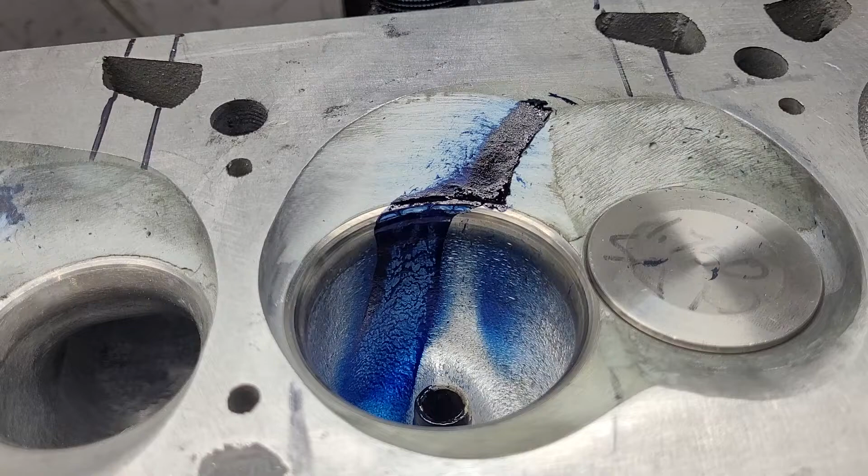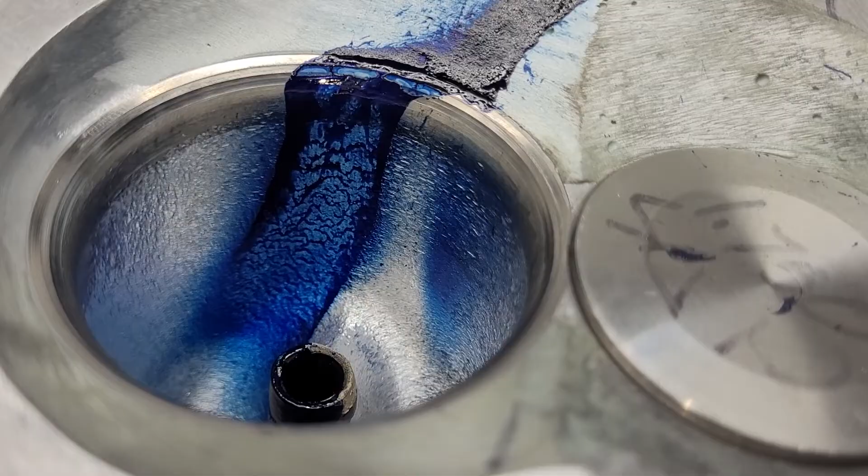Okay guys, did a little more work on the inside port of the Olds CNC heads. As far as our liquid flow goes, looks like we're quite a bit better than we were. Let's take a quick look at our chamber.

Interesting. Is it better? It's a good question. I don't think it's bad, I think it's pretty good. A lot of speckles on the valve. Not quite as much coverage, I think, as the last time.

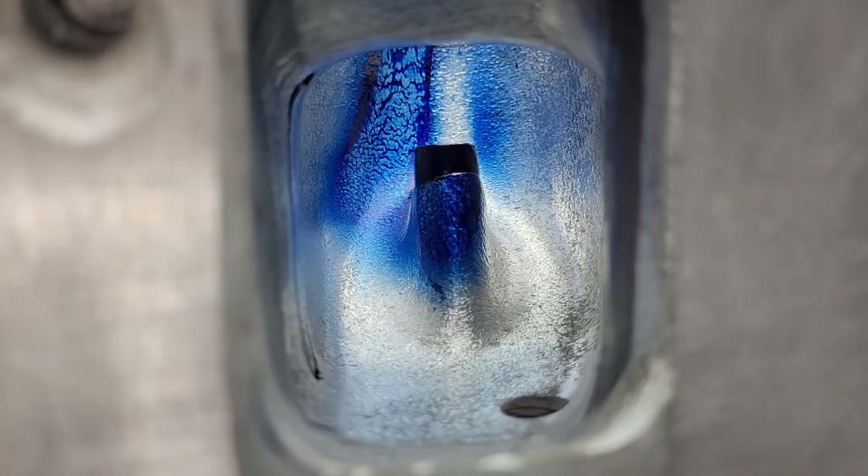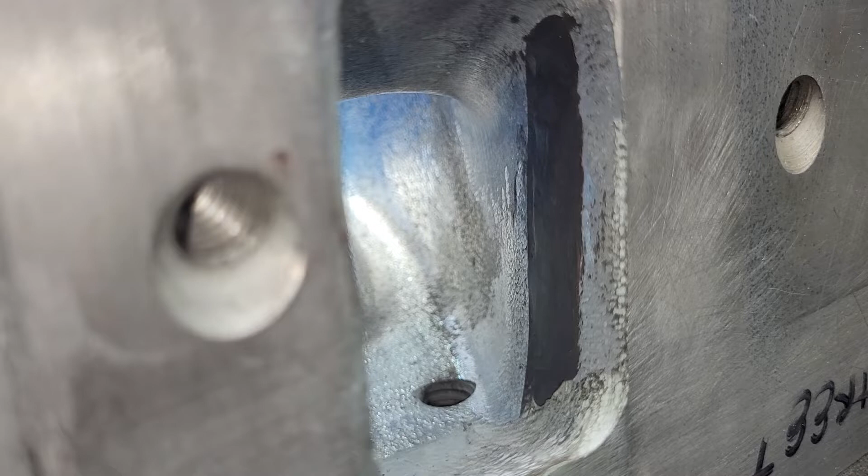Due to the port being straightened out more, we got way more liquid on the right-hand side. You can see that push rod has been moved over quite a bit and changed the port to feed that part of the bowl better. In reality, I had to do some work on the straight wall side too, because that machined out bolt really causes an issue.

I also noticed that this bowl was considerably narrower than the outside bowl, so I did add a little area where I thought it needed it.

Okay, let's take a good look at this bowl. Got a good hit on the guide. We got a nice wide swath in the bowl on both sides. I'm pretty sure that's the best we've done on the bowl to date. Take a look down, you can see right down to the filler. And our angle into the chamber is a good angle.

I did take a little area out over here because I thought that was blocking, it was a little too straight. In reality, I probably could use a little more area right there, but it's not bad where it is right now.

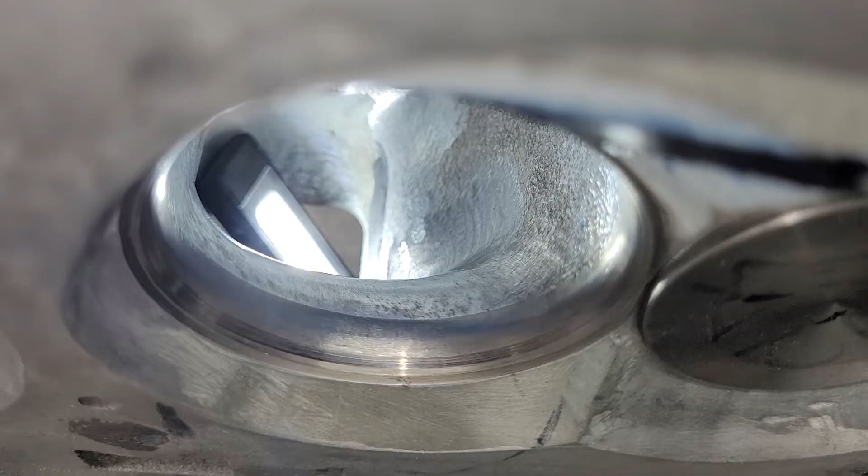Okay, the short side really doesn't look different. You can see where I gave it a little area on the center of the cylinder above the short side radius. You can see I hit it with a sand roll, it's a little notchy still. I should have looked at that some more, but it seems to have helped. So we'll take a look at that.

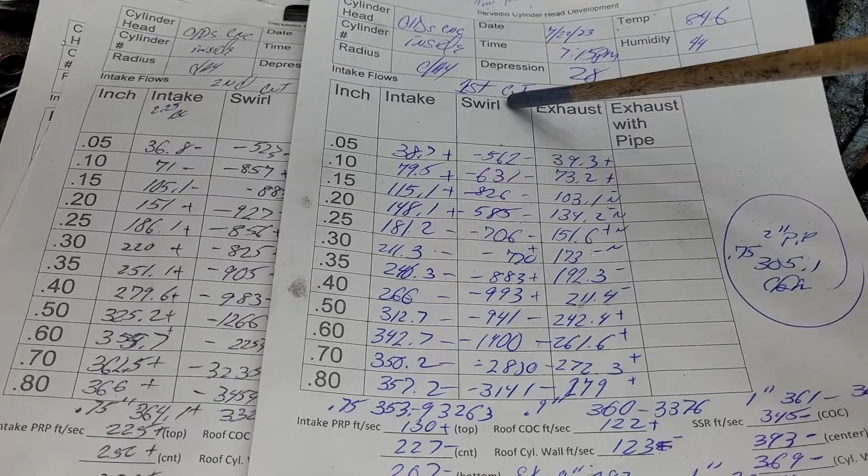Okay, I'm quite a few videos ahead, so I'm not really sure when this is going to air, but this is our first cut inside port, this is our second cut inside port. How did we do? Well, we got 2 minuses, 3 minuses, and then we did better everywhere else, so I'm going to take that as a win.

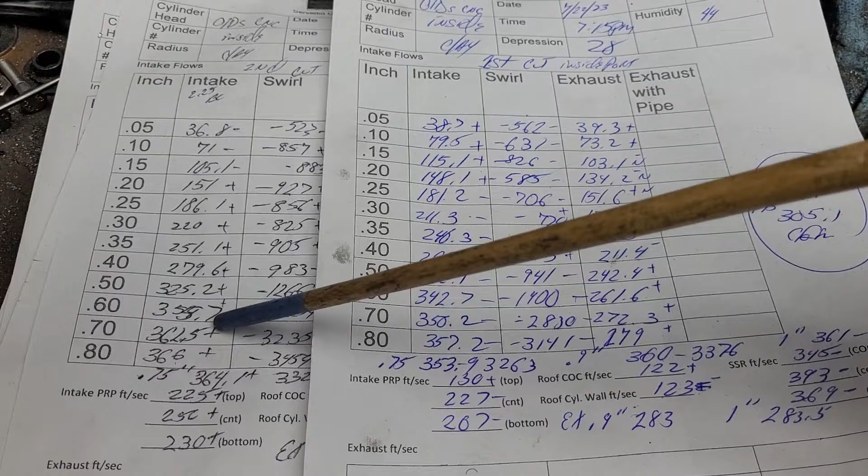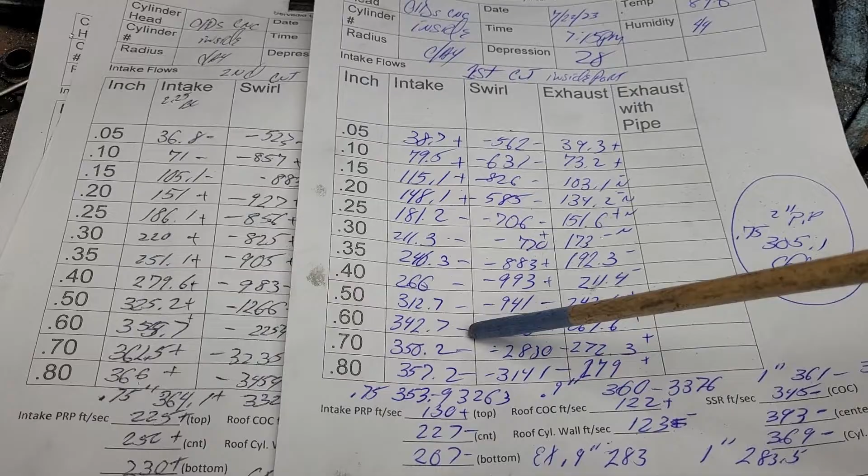Okay, 220 at 300 versus 211, I'll take it. 600 to 355, 600 to 342. Take it out as a win.

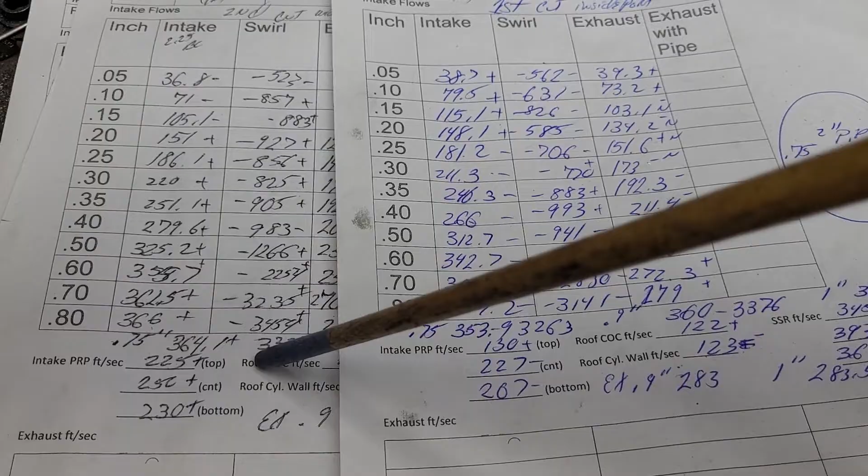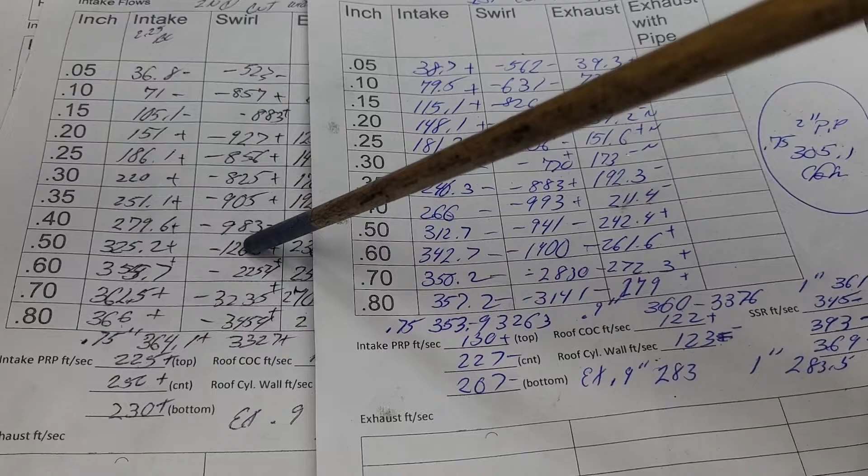We go 364.1 at 750, we got plenty of swirl, we got 3,000 and change. The swirl curve is definitely almost all pluses except for the very top, and we got one anomaly right here. That's when she just starts losing it over the short side. More than enough swirl to take care of things.

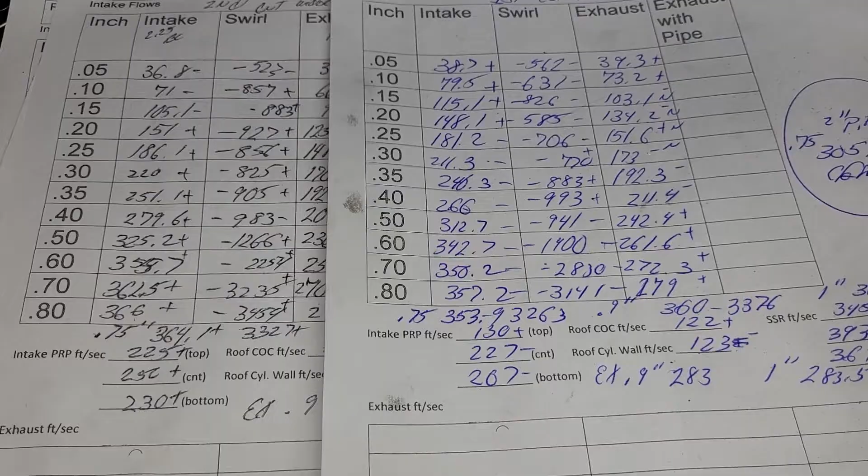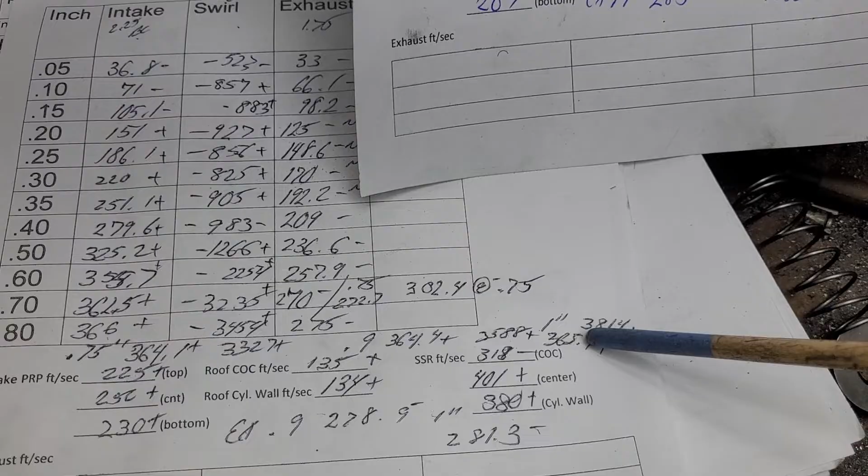Let's go to the higher lifts. Yeah, we're 366, 364, we start losing a little bit, 365. So that's telling me I could be doing some more work to that short side, but we'll wind up losing probably some in here.

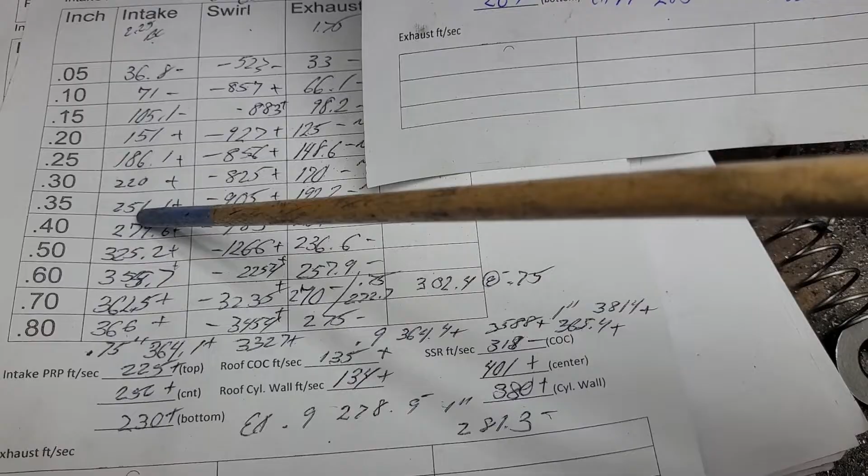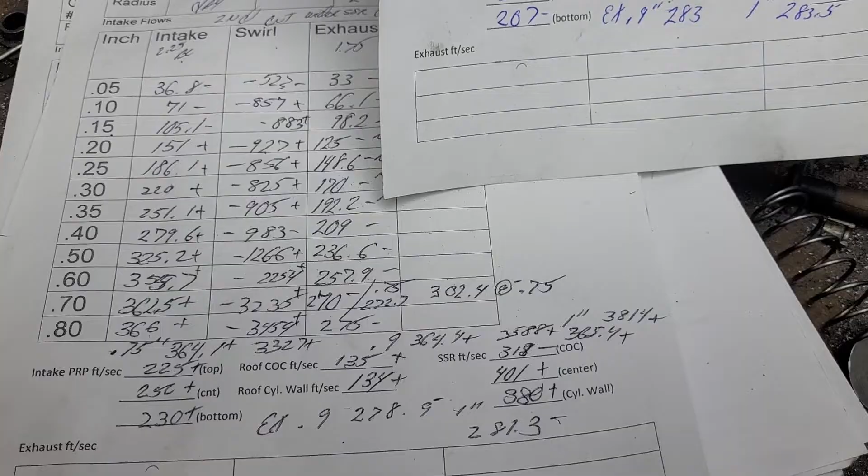And 220 is a fairly decent number. It's not great, but it's decent. And I think I'm going to have the owner take a look at this, put this in his computer and see what we've got.

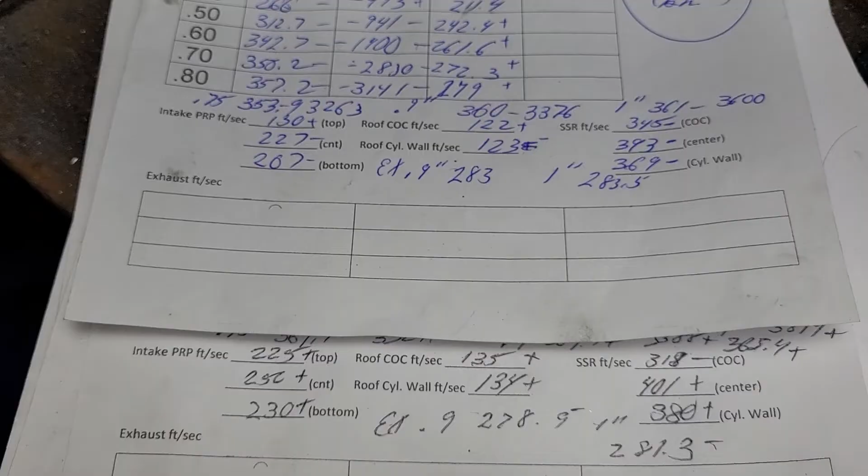Now, I did do some work as far as our air speeds, which I think was a big success. Okay, these were our air speeds, this is what are our air speeds. Plus, plus, plus, right? We went from 130, which is pretty dead, to 225.

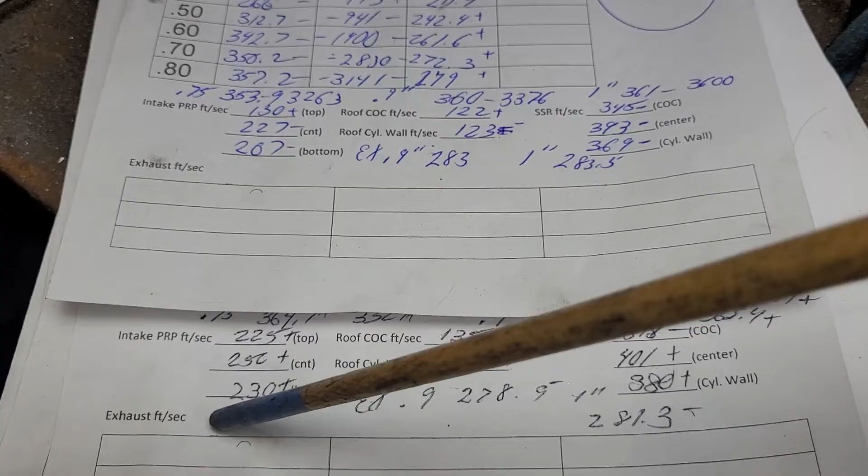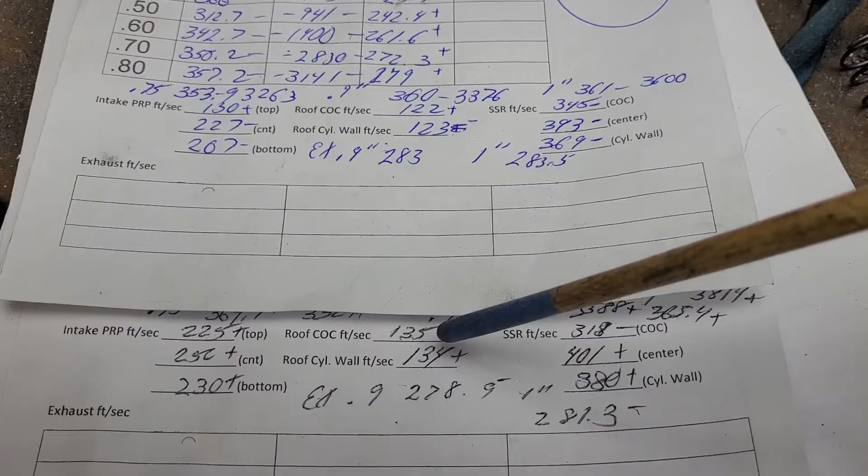Made a huge difference on your pushrod pinch, the whole pinch works way more efficiently now. Take a look at our roof, our roof picked up nicely. 122, 123, 135, 134. I did do work on that roof to fix those air speeds.

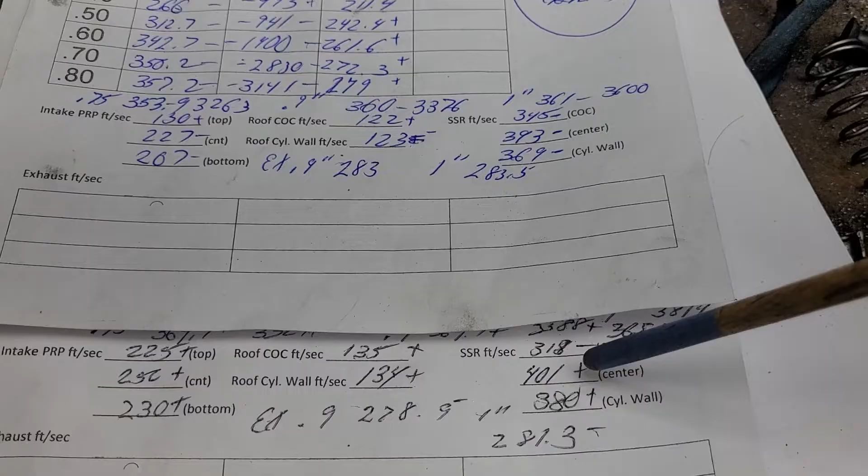Now take a look at the short side. Not a complete success, but not bad. We go from 345 to 318. 393 to 401, it actually went up in the center, where I gave it some decent amount of area here. You can see it slowed down, but that air didn't want to move over that way. I mean, some of it did because our liquid moved over, right?

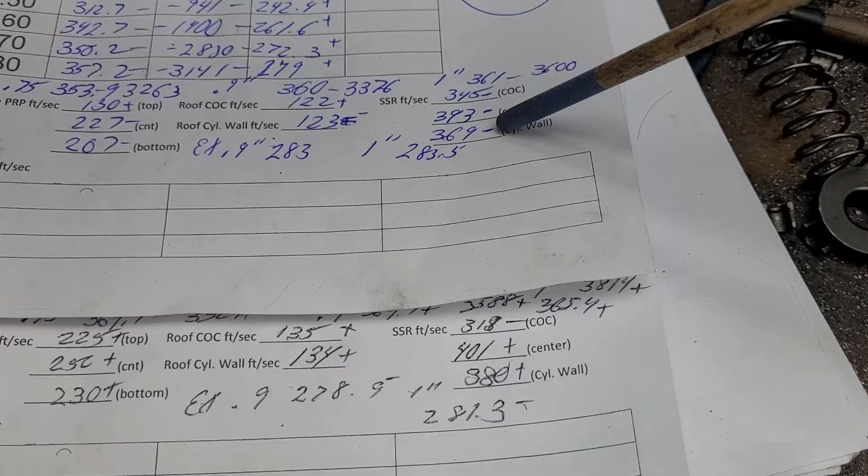And our last number was 369, 380, went up. Now this corner is tough because we got that bolt in the way. Let's take a look at that. Okay, that corner is tough to get.

Let's take a look at this way and we'll take a look at the other way. You got that bolt that's ground down, right? And a lot of air wants to get around that. I'm not sure what I should do with that, because I may be doing more harm than good at that point.

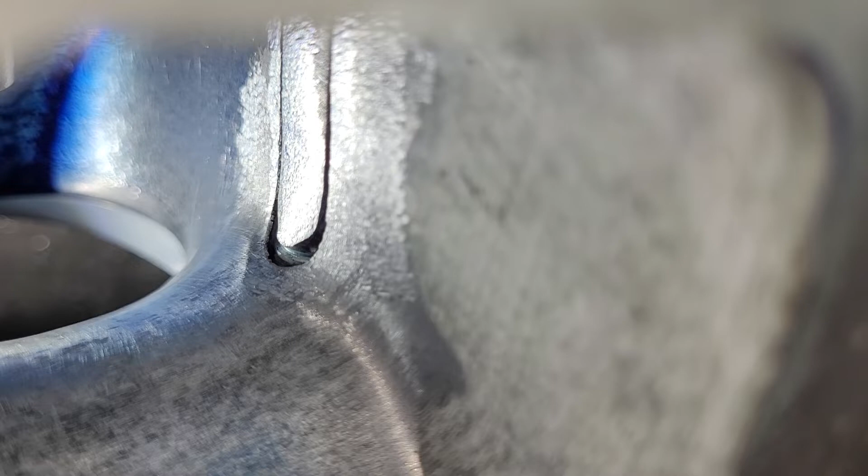Okay, I did leave a rough finish on that, that was actually a mistake. That should have been polished out, but I obviously forgot to do it. So that corner right there is really fast and could use a little more work, but I think we're going to hold off on that until the owner takes a look at the numbers.

We did get a little bit of blue right on the floor of the short side, similar to that. Not exactly the same, but not bad. Let's move that light. I'm going to take that as a win. Sorry guys, I think that looks damn good. And I get the feeling that this should stay where it is, because remember, we got two different intake ports.

Let's show the liquid on the other port. Okay, this is the outer port. Still not bad, definitely got more on the outside wall than the inside port, but it's also coming in at a different angle.

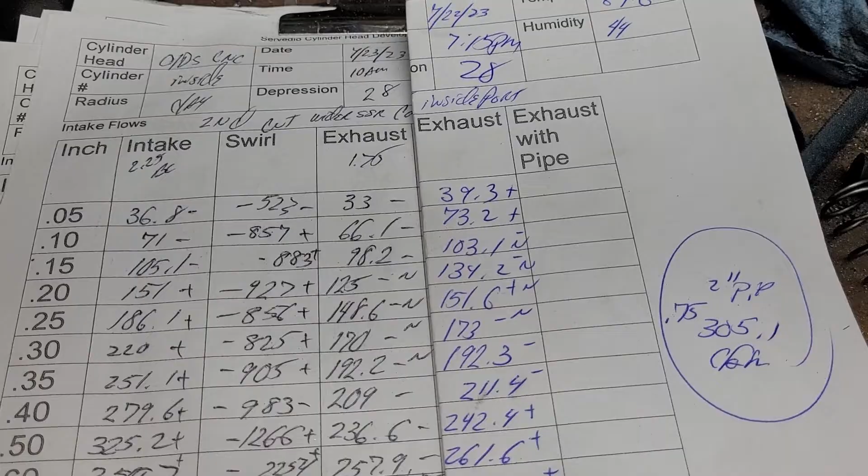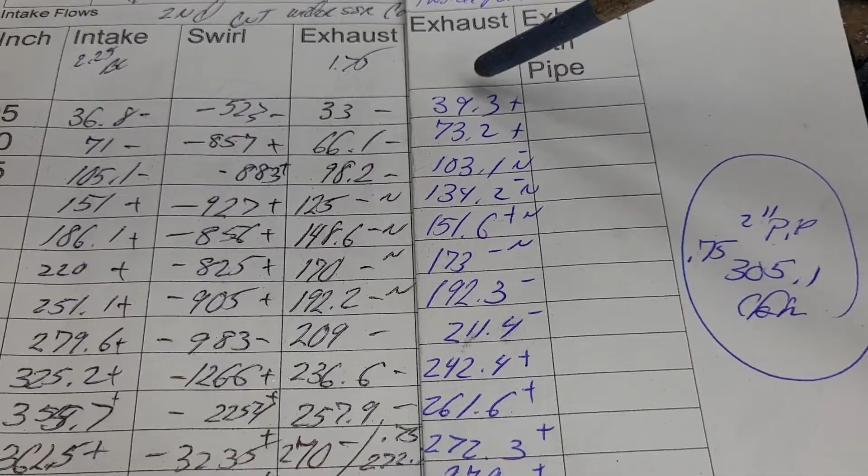Alright, I also did work on the exhaust port. Not a complete win. Okay, here's our second cut, here's our first cut. Minus, minus, minus, noise, noise, noise. All minuses, all minuses to 600.

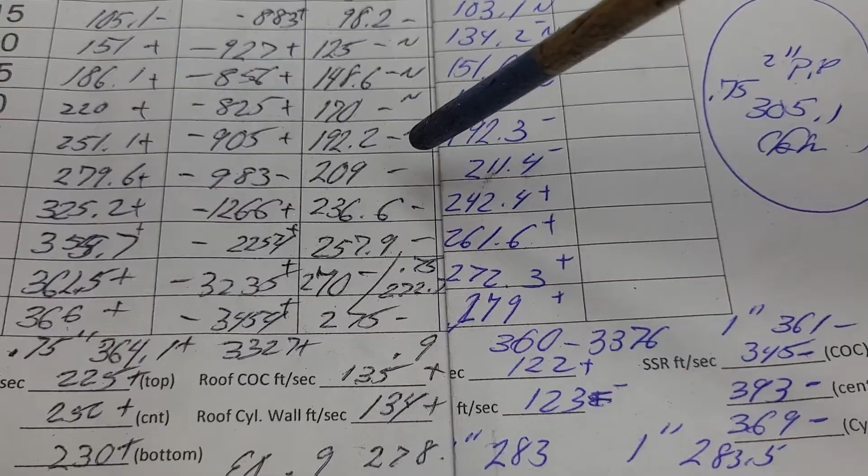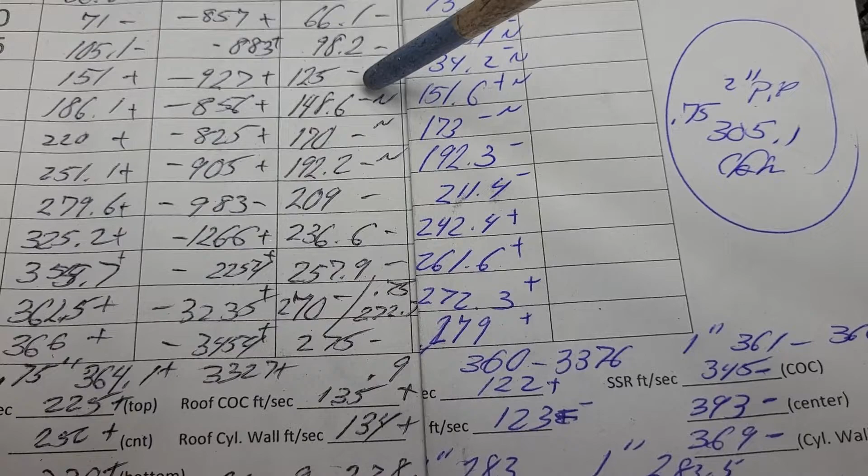Now, remember I also fixed the bore adapter on our bore, so there, it's much better now than the way it was. This was the way it was. It gave the exhaust, these flows had a lot more area around that exhaust. So this is more shrouded with our bore adapter.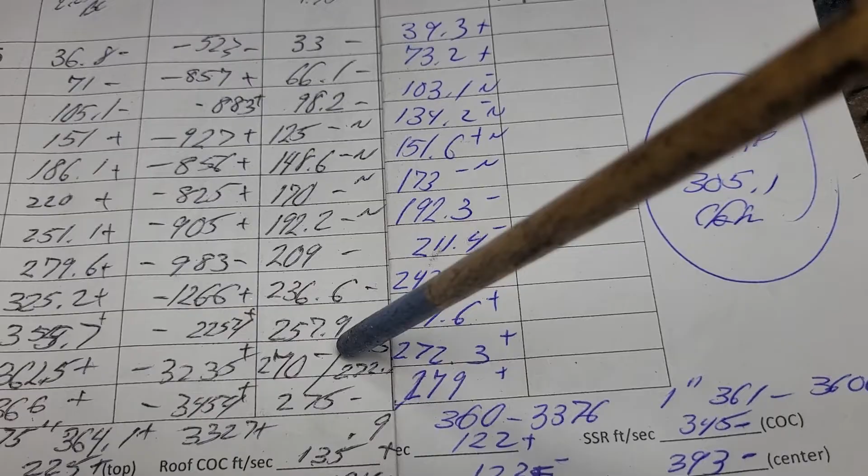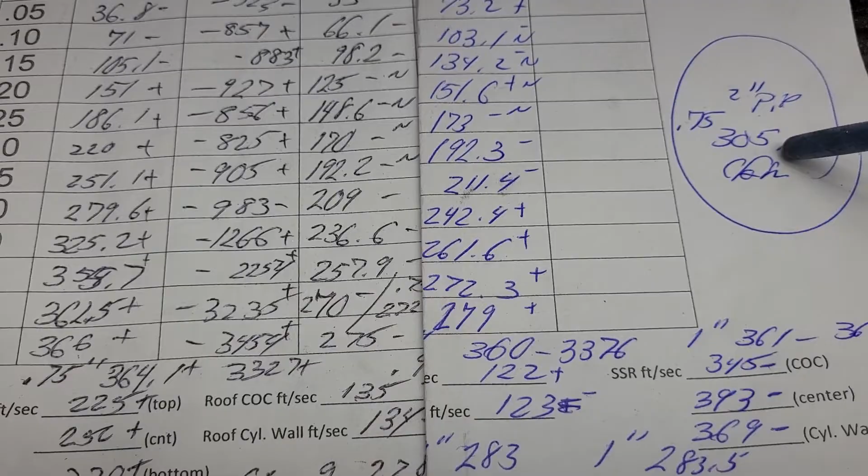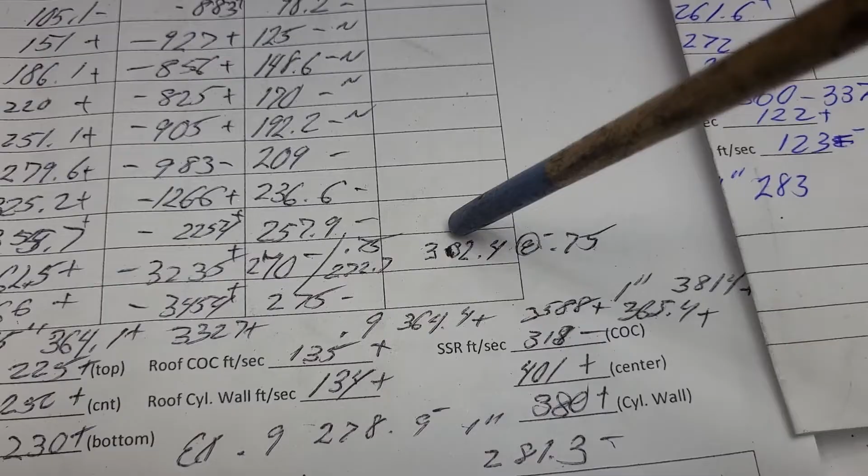But take a look, as it progresses, it tops out almost as good. All right, 270, 272, 275, 279. This had 305 at 750 with a pipe. This was 302.4 at 750.

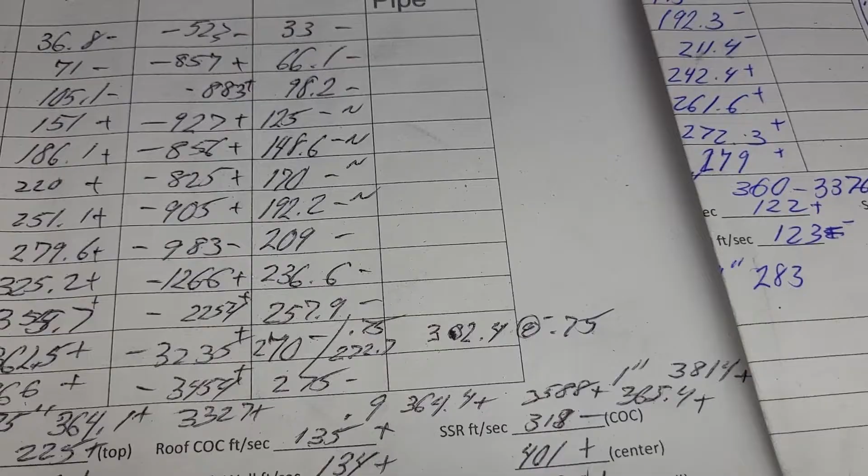This is what's really, remember, it's much more shrouded now, but it's flowing almost as well. So I would have to take a look and see how close these are to the outer port, exhaust port. Like I said, I think they're the same port, and he can just pick whichever one he wants to use.